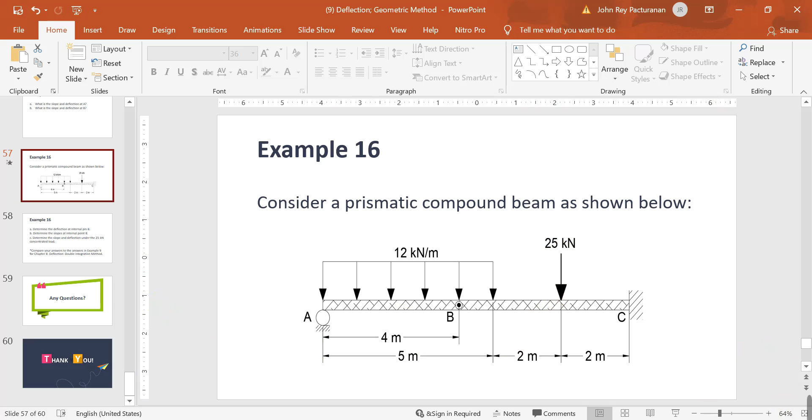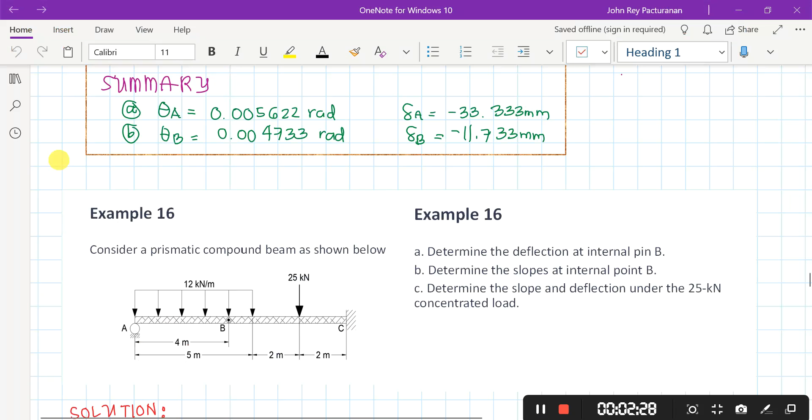By the way, there's a note here: compare your answers to the answers in example 9 for chapter 8, the deflection using the DIM, since I already solved that. The rule is, whatever method you use to compute deflection and rotation, the final answer should be consistent. This conjugate beam method is the third method I've presented. We still have two more methods to discuss in the next playlist: the unit load method and Castigliano's theorem.

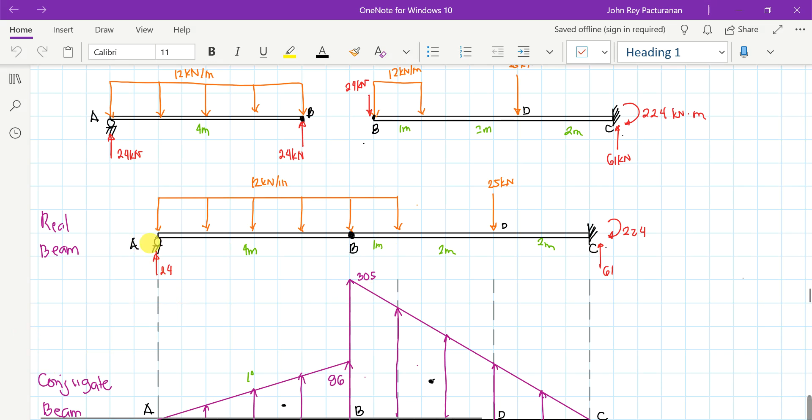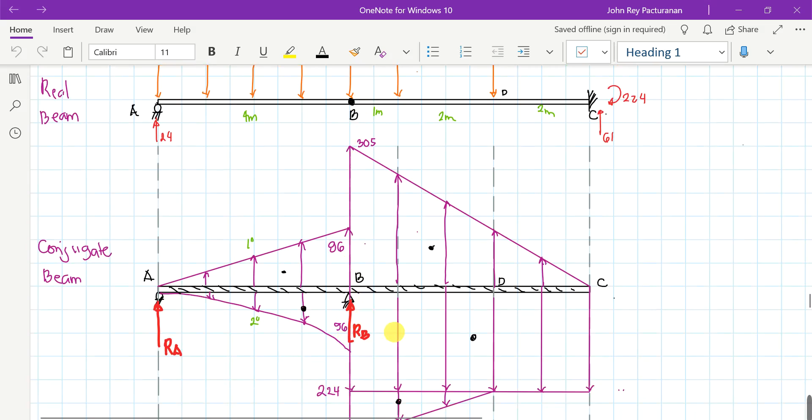Since A is a simple support at the exterior end, it remains an exterior support. But remember, when we discussed drawing the conjugate beam relative to the real beam, when there's an internal pin in the middle, its counterpart in the conjugate becomes a support. So from the internal pin, B becomes a support reaction. And lastly, since point C is fixed, in the conjugate beam it becomes free. So this is the rule.

I hope you understood how I drew the conjugate beam. Next is the moment diagram by parts. My fixity, or reference line, is point B, for drawing the moment diagrams. This will also be easy—let's start with this 24.

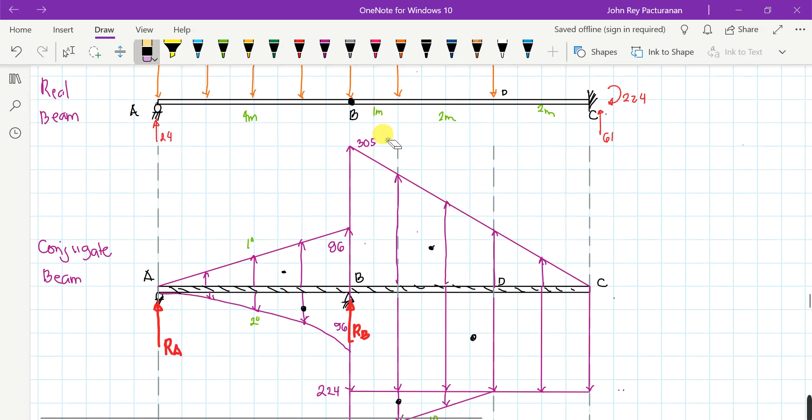Clockwise na yan, class. Another, itong triangle, clockwise din ito, kaya positive. Plus 1/2 ng 3 times 75. Then, yung moment arm niya from point A, 4 meter ito, class. Tapos ito malamang 1/3 ng 3 meter. Eh di ba dapat 3 meter yan kasi yung 25 kilonewton ay may distance na 3 meter from point B.

Okay? So lastly, ito ulit na spandrel natin. 1 meter lang to. So 1/3 since spandrel siya, class. Clockwise pa rin yan, 1/3 ng 1 times 6 and it has a moment arm of 4. Tapos, malamang 1/4 ito, di ba? 1/4 ng length ng spandrel, and its length is 1 meter.

So, ayan, nasulat na natin yung equation. All you need to do is to equate it at 0. So, once na na-equate nyo na siya at 0, class, bahala ka na kung paano mo hahanapin yung reaction at B.

And using your calculator, you may pause this for a while to verify nga na ang sagot is 20,413 over 24. Okay? So, kung naniniwala ka naman na tama yan, so pwede na akong mag-proceed. Basta pwede nyong i-pause itong video, then i-check mo, class, kung tama yung aking calculations.

Pero I believe tama naman to, class. So, next, para mahanap mo lang naman yung RA, by the way, since positive yung RB, class, it means tama yung assumption ko na upward siya. But it doesn't mean na yung RA is tama siya, di ba? Ibig sabihin, tama yung assumption ko ng direction. So, i-check pa rin natin.

So, para mahanap mo yung RA, all you need to do is summation forces vertical equals 0. So, I do not need to elaborate this further. Ganon din lang naman. So, ang assumption nga nito, mga load, kumbaga, ito, yung equivalent concentrated load niya is the area of this one.

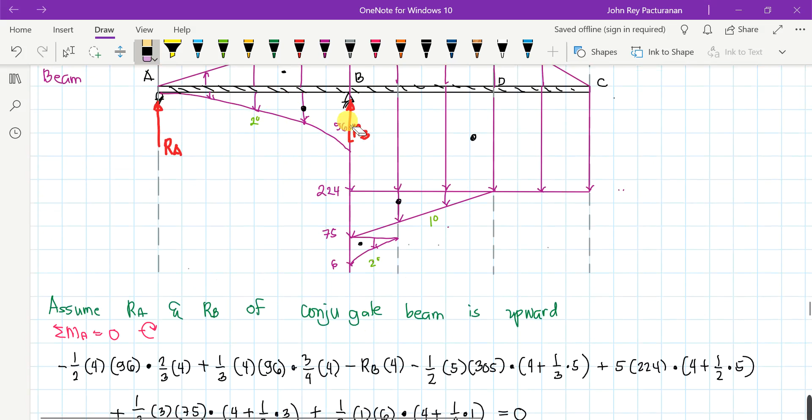So, pag titingnan nyo yung ating equation, RA plus supposed to be RB siya, but RB is 20,413 over 24 plus 1/2 ng 4 times 96. It is referring to this triangle plus 1/2 ng 5 times 305 for this triangle, class, upward yan, minus 1/3 ng 4 times 96. I am referring to this spandrel of the parabola, minus this rectangle, 224 times 5, ito siya. Another triangle, minus 1/2 ng 3 meters to times 75. And lastly, for the spandrel, 1/3 ng 1 times 6 equals 0.

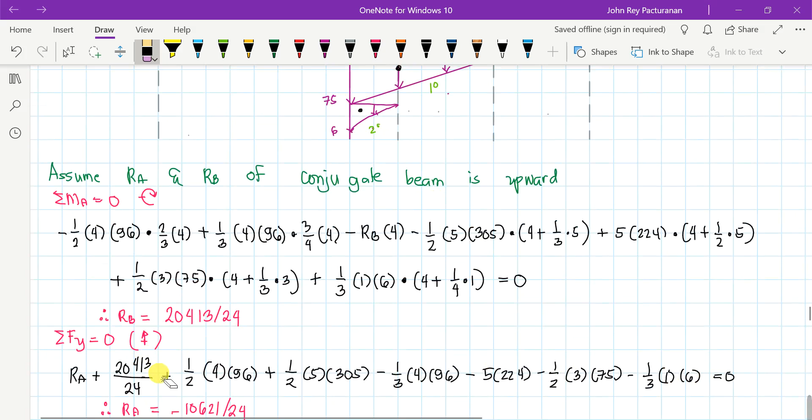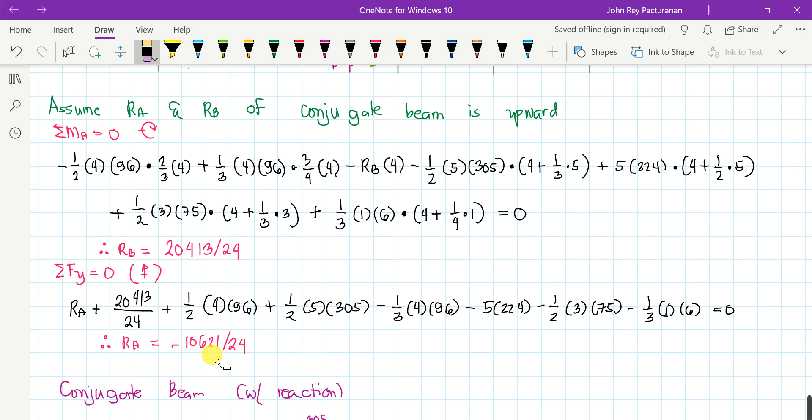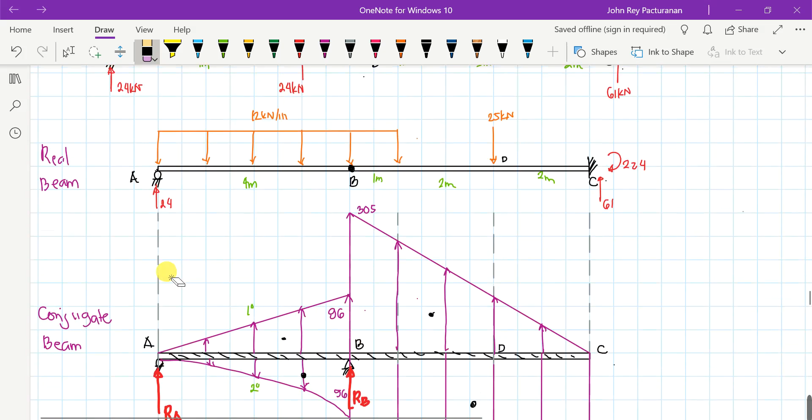And kapag kinompute mo, class, pagtyagaan mo na lang to, using your calculator, ang mahahanap nyong RA ay negative 10,621 over 24. So, ibig sabihin, class, dahil negative siya, mali yung aking initial assumption na upward siya. Okay? So, therefore, ang gusto niya ditong i-point out, class, dapat ang tamang direction ni RA ay pababa. But yung RB, since positive yung na-compute natin, class, ibig sabihin tama siya.

So, ayan na. Ito na yung ating conjugate beam with reaction. I already corrected myself sa direction. Normal naman, class, na sa initial assumption ng direction nyo, mali talaga. Oo, normal lang yon. Kasi hindi naman tayo

Perfect na unang tingin mo pa lang, mape-predict mo na kung ano yung tamang direction ng reaction. Sa truss nga, di ba? Hindi mo mape-predict kung yung member na yun ay tension or compression unless talagang sobrang talim na talaga ng inyong ang paningin, alam mo agad kung compression yan or tension.

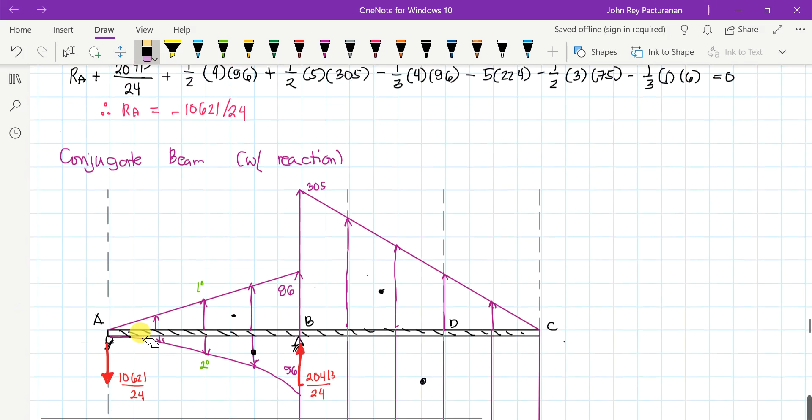Okay, so anyway, back to the discussion. Itong 10,621 over 24 I already placed is at downward na. So, corrected na to. While itong 20,413 over 24, upward siya. Okay?

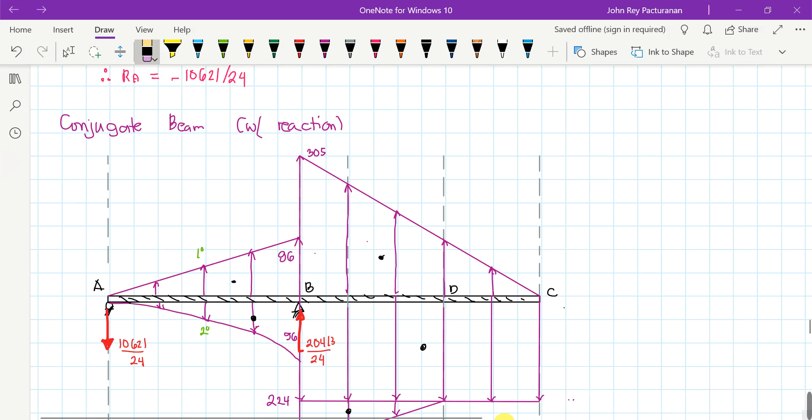Since na-establish na natin yung conjugate beam at may reactions na tayo, pwede na natin class sagutan yung mga tanong. So ano ba yung mga tanong dito? For letter A, nasaan na siya? Letter A, determine the deflection at internal pin B. And letter B, determine the slopes at internal pin B.

So ito kasi yung gusto kong i-emphasize ngayon. Since meron ngang dalawang slopes, ang internal pin, paano natin yan masosolve using the double integration, using the conjugate beam method. Kasi diba sa DIM, ang ginawa lang naman natin, just substitute the value of X after you establish the load. Diba? So paano sa conjugate beam method?

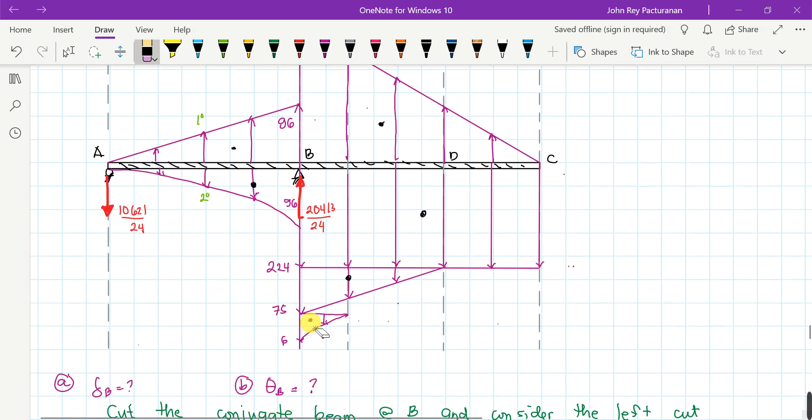So, ganito class ang mangyayari. So, for letter A and letter B, pagsasabayin ko na to eh. So, ano lang, kung paano natin kinocompute yung shear and moment sa beam, i-cut mo class yung beam natin sa point B. Diba? Ang gagawin ko, halimbawa, meron tayong cutting line. Ito siya. Palitan lang, lakihan ko lang.

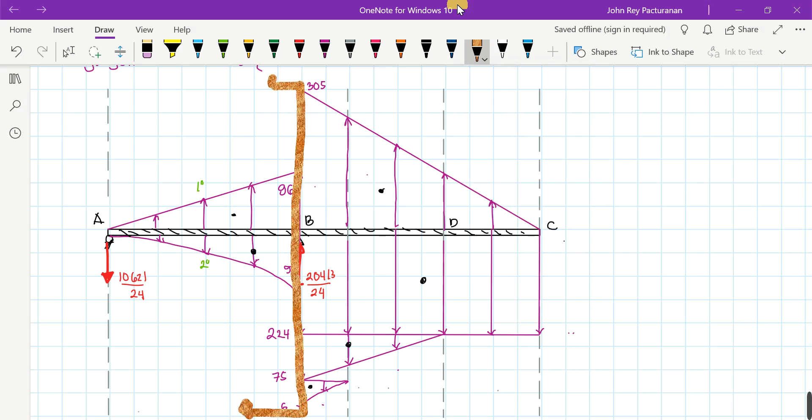Halimbawa, ito yung ating cutting line class. Tapos, piliin mo yung nasa kaliwa. So, therefore, diba, since nakuha natin siya sa B, ma-activate yung internal shear and moment ng beam na yon, ng point B na yon. Kaya lang, since conjugate beam ito, ang ginawa natin class, EI theta tapos EI delta or for deflection.

So, ang mangyayari class, dahil merong concentrated load due to the reaction sa B. Kung maalala nyo, kapag nagko-compute tayo class ng shear, recall lang natin, sa chapter 4 which is the analysis of beam, pag nagko-compute tayo ng shear sa point kung nasaan yung concentrated load, alam mong dalawa yon. So, ganun din dito. Since the shear of the conjugate beam reflects the slope in the real beam, ang mangyayari, magkakaroon na dalawang shear itong B.

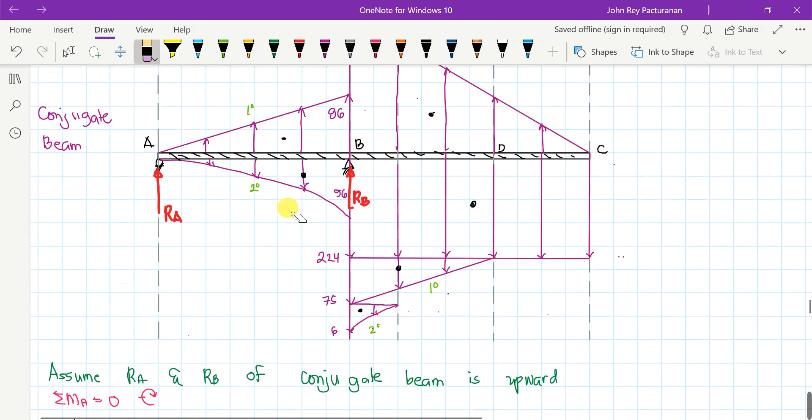So, therefore, magkakaroon ng dalawang slopes yung B sa real beam. So, ganun yon. So, paano yon? Di ba nga, may dalawang cases tayo doon. Yung unang case, hindi mo muna i-consider yung concentrated load. Tapos, yung pangalawang case ay kino-consider mo na siya. I hope naiintindihan nyo yung point ko ngayon dito. Di ba? Ulitin ko, since yung point B is the point kung saan mayroong concentrated load, just because of this reaction, meron siyang dalawang shear sa conjugate beam. And since dalawa ang shear niya sa conjugate beam, ibig sabihin, dalawa ang slope niya doon sa real beam.

So, yung unang case, ganito siya. Kinuha ko nga itong nasa kaliwang bahagi, pero hindi ko muna class nilagay yung 20,413 over 24. So, ito lang yung i-consider natin by equilibrium.

So, para mahanap natin yung unang theta, EI theta B, summation forces vertical equals 0. Clockwise, upward equals downward. So, ang mangyayari dun class, ang upward natin, isa lang is this triangle. So, nandito na siya, 1/2 ng 4 times 96. Well, ang downward ay 3, 10,621 over 24 plus 1/3 ng 4 times 96, the spandrel of the parabola, plus of course, itong EI theta B.

So, pag kinompute natin to class, ang EI theta B is negative 9,085 over 24 or simply negative 378.5417. So, to finalize for this one, the theta B will be negative 378.5417 over EI. Okay? For the case naman, para mahanap natin yung deflection sa B, ang gagawin mo lang naman is summation moment at B equals 0.

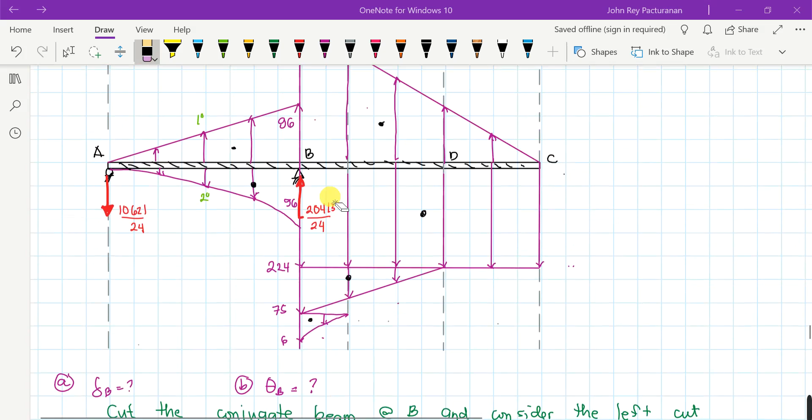Kaya lang, yung case 2, alam nyo naman ang mangyayari, ilalagay ko lang class yung reaction dito sa B na 20,413 over 24. So, ito na siya. Case 2, RB is part of the analysis.

Pagpatuloy natin yung analysis, so this time, pag nag-summation forces vertical tayo equals 0, dalawa na silang upward, bukod dito sa triangle class, yung reaction mismo na 20,413 over 24 is an upward. So yung downward, parehas din lang naman. So you may pause this video, ito lang naman siya, 10,621 over 24 plus 1/3 ng 4 times 96 plus EI theta B. So ang EI theta B natin this time is positive 472. So therefore, ang theta B natin class ay 472 over EI.

Okay, so I hope that is clear. So next natin na i-consider summation moment at B equals 0. Clockwise moment equals counterclockwise moment. Pasensya na. So although, yun na nga, di ba? Kung maalala yun sa chapter 4, kahit nasa point of concentrated load tayo, tapos may dalawa tayo class na may dalawa tayong shear dito, expect natin na yung moment natin class ay parehas pa rin.

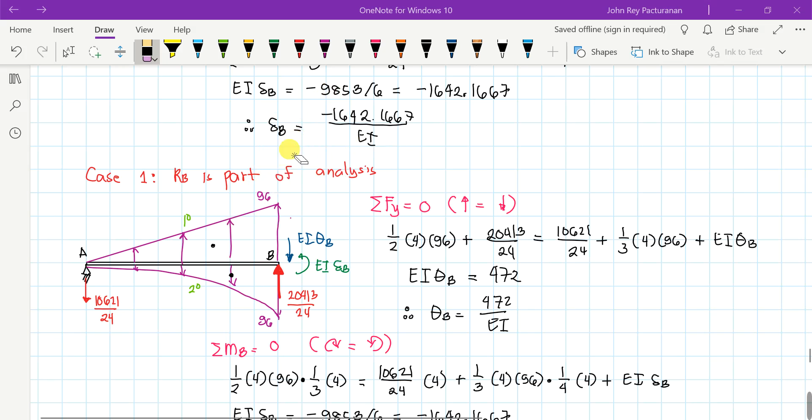So therefore, isa rin lang naman ang magiging deflection dito. Kasi generally, itong 20,413 over 24, nag-a-act siya class sa point B. So therefore, wala siyang moment dyan. So pag kinompute mo, parehas pa rin class ang mahahanap mo na deflection at B, negative 1642.1667 over EI. So ayan, again, ang nangyari, meron tayong dalawang slopes sa B, yung negative 378.5417 over EI and yung 472 over EI. Kaya lang, isa lang din naman yung ating deflection kahit anong case ang gamitin mo.

Negative 1642.1667. By the way, napalimutan kong palitan ito. This is case 2. Okay, so I hope that is clear. So, ganito yung process natin using the conjugate beam method.

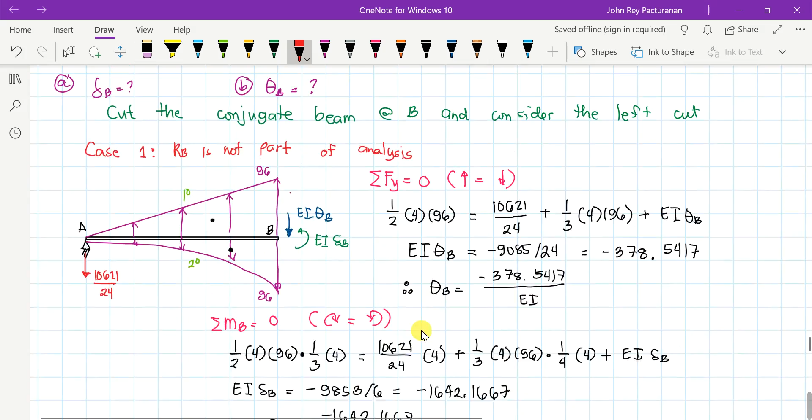So, next, ano na ba yung next na tanong? Yung letter C na lang naman class. Ang kailangan natin, determine the slope and deflection under the 25 kN concentrated load. So, ang gagawin natin dito, yung 25 kN nga, nilagay ko siya class sa point D.

So, therefore, i-cut natin ang ating conjugate beam dito sa point D. Tapos, bahala ka na kung alin ang pipiliin mo, yung nasa kaliwa or nasa kanan. Pero kung ako ang tatanungin mo, dito na lang ako sa kanan kasi halatang-halata naman na this is less complicated compared sa nasa kaliwa.

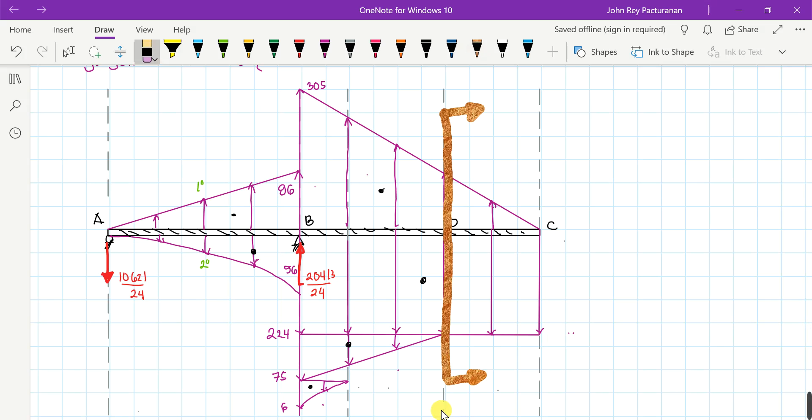Anyway, kapag right naman ang pinili mo, na-discuss na natin sa mga previous discussion kung ano yung convention ng positive moment and shear. So, ito siya, kapag right section. So, therefore, ang pipiliin natin is right. Erase lang natin to.

Since sa kanan siya, pag nag-ratio and proportion ka dito, ang mahahanap mo ay 122. Check nga natin. Tawagin ko tong y, at x, 2 meters to, from D to C. 2 meters is to y is equal to 5 is to 305. Ratio and proportion lang to dahil triangle equals 5 is to 305.

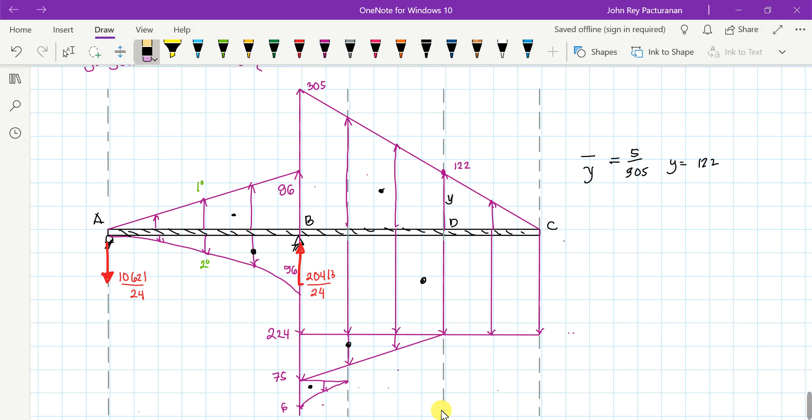Ang mahanap ninyo dito na y ay 122. Yung rectangle naman, itong rectangle na to, wala naman ng ratio and proportion kasi pag rectangle, constant yung kanyang height at 224. So kapag pinili mo itong D, kinat mo, ito lang yung specific loads ang madadamay. So ito na siya.

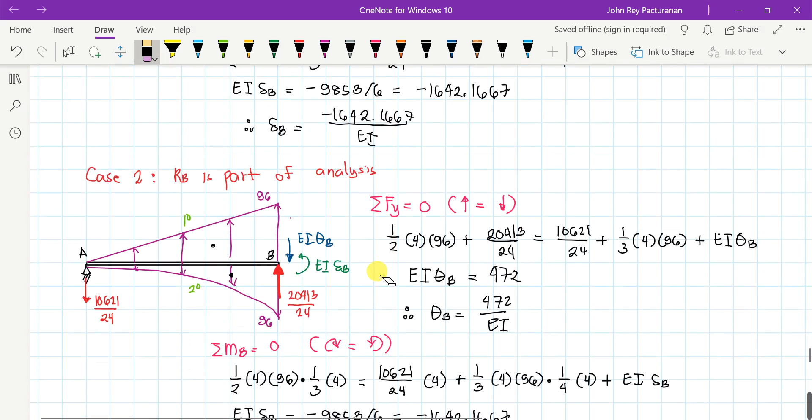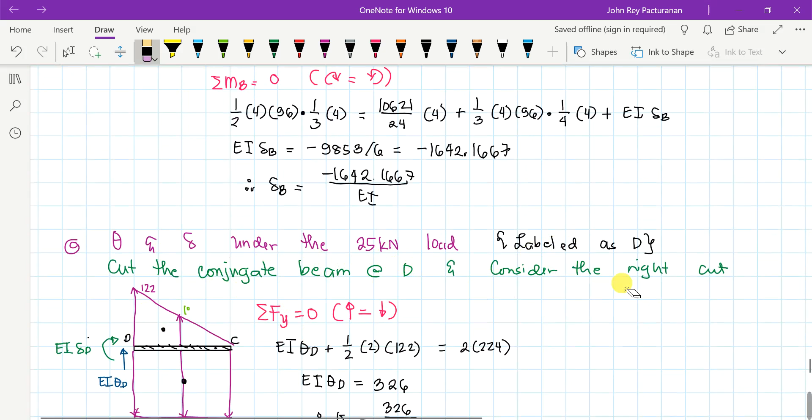For letter C, slope and deflection under the 25 kN load. Inilabel lang natin siya as D para madaling pag-usapan. So, cut the conjugate beam at D and consider the right cut. Nilagay ko na yun, 122 dito and 224.

So, all you need to do is to utilize the equations of equilibrium. Summation forces vertical equals 0, upward equals downward. Dalawa ang upward, EI theta D, plus ito mismo, 1/2 ng 2 times 122 equals 2 times 224. So automatic, EI theta D is 326. And therefore, yung theta D natin ay magiging 326 over EI. Okay, I hope that is clear.

Next, summation moment at D equals 0. Clockwise moment equals counterclockwise. Dalawa ang clockwise moment natin: itong EI delta D, tapos ito mismong downward. So EI delta D plus 2 times 224 times 1/2 ng 2 ito. Itong upward is counterclockwise siya.

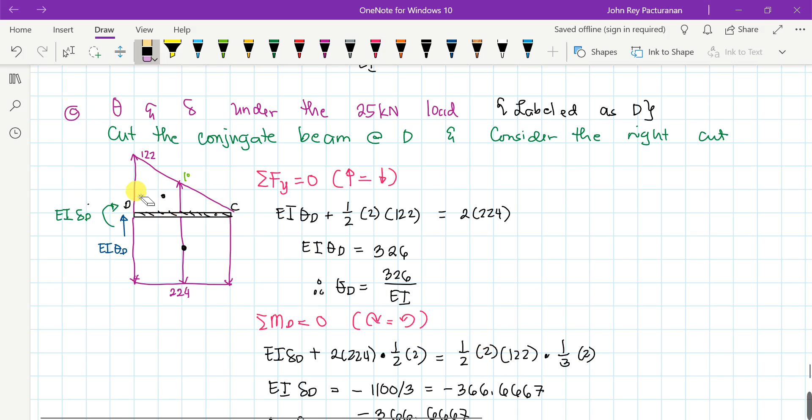That is equal to 1/2 ng 2 times 122 multiplied natin ng 1/3 ng 2 as the moment arm, kasi yung center of gravity niya ay nandoon. Pag sinolve natin, yung EI delta D natin, that is equal to negative 1,100 over 3, or simply negative 366.6667. So therefore, ang mismong deflection at D is equal to negative 366.6667 over EI. So ito na ang ating slope and deflection under the 25 kilonewton load.

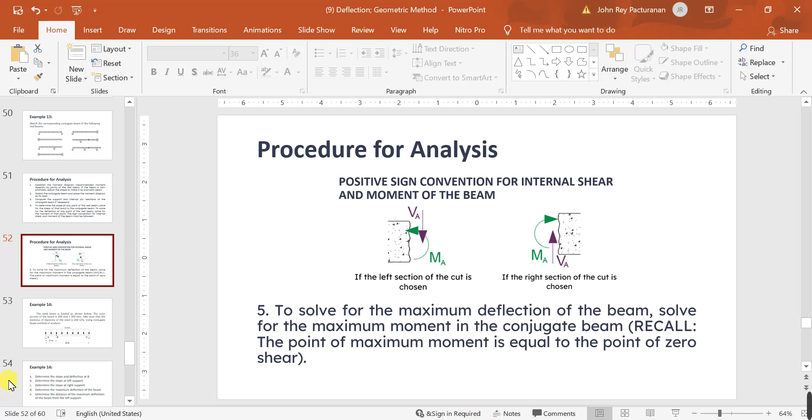Okay, so to summarize, ang deflection ng B, yun yung unang tanong, di ba? Balikan natin. The first question here is determine the deflection at internal pin B. So negative 1642.1667 over EI, ibig sabihin nasa baba siya.

Pangalawang tanong, determine the slopes at internal pin B. Dahil internal pin siya, dalawa ang slope, negative 378.5417 over EI and 472 over EI. Ayan siya. Yung pangatlong tanong, simple lang din naman yon.

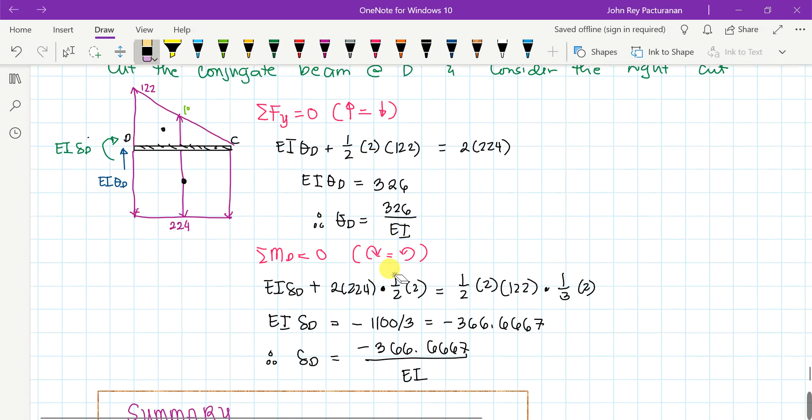What is the slope and deflection under the 25 kilonewton concentrated load? So therefore, na-compute din natin yon na yung slope niya ay 326 over EI while its deflection is negative 366.6667 over EI. So before I end this one, may nakalagay kasing note na i-compare natin yung naging sagot sa double integration method.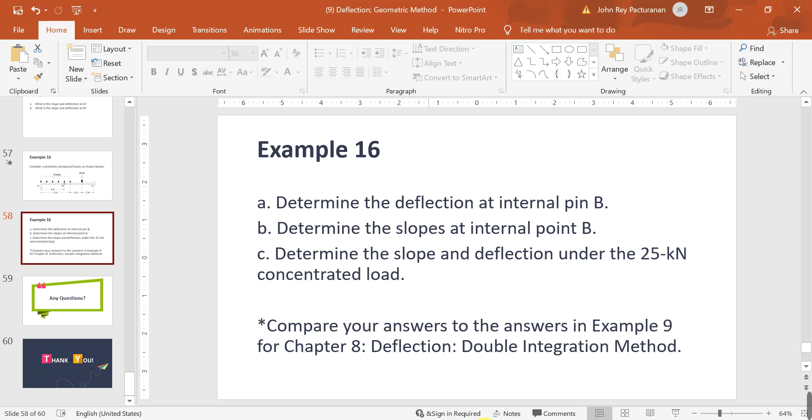Balikan natin yon sa chapter 8. So, ito yung sagot natin doon. The deflection at B is negative 1642.1667 over EI. The slopes are negative 378.5417 over EI and 472 over EI. And lastly, the slope at the point of concentrated load is 326 over EI while its deflection is negative 366.6667 over EI. So, parehas na parehas yung mga tanong, at the same time, parehas na parehas yung ating mga sagot.

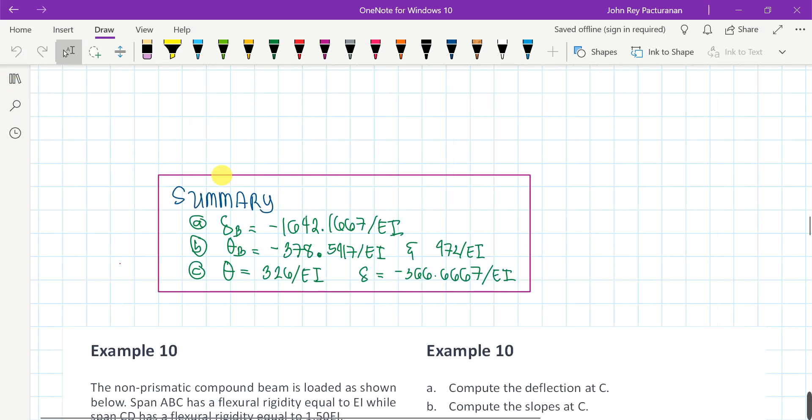Okay, so it means na, yun na nga, paulit-ulit ko tong sinasabi, kahit anong methods ang gamitin ninyo sa analysis, still magiging pareho din lang naman ang kanyang sagot kasi yun naman talaga ang essence niyan, kasi it is proven na. Okay?

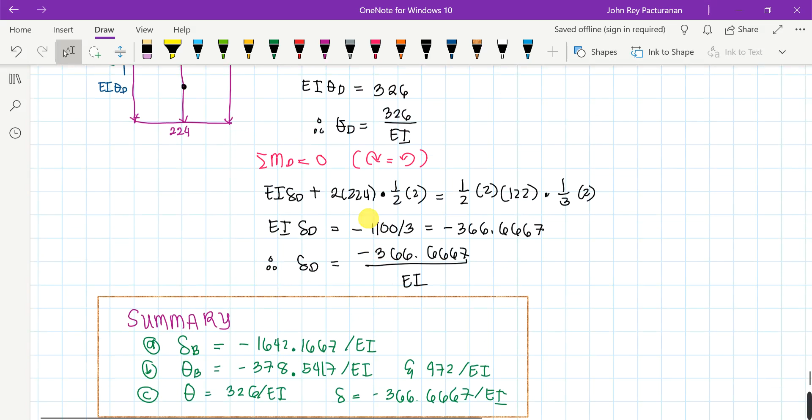So, ang next discussion natin for the next playlist will be deflection again, pero this time gagamitan na natin ng energy method. Dun na class, pag-uusapan na natin hindi lang mga beams kasi yung unang tatlong methods ng deflection, ang ginawa lang natin mga beams. Pero pagdating sa energy method, ang pag-uusapan na natin ay deflection of trusses and deflection of frames. Of course, kasama pa rin yung beam.